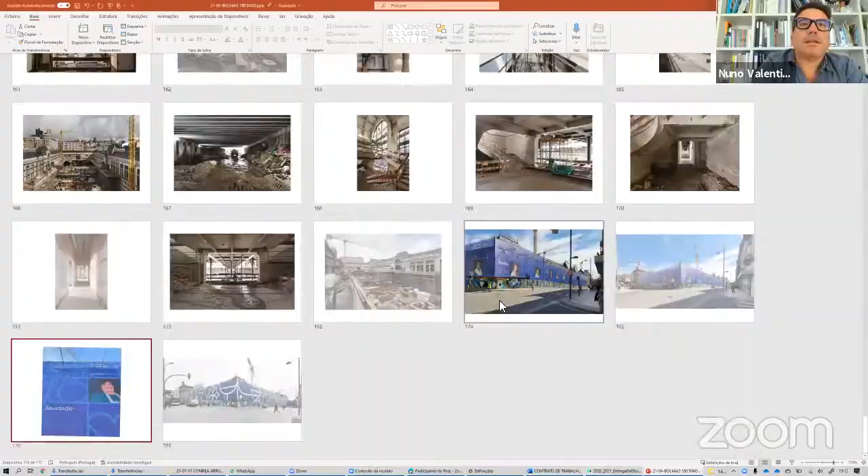Yeah. Yes, just a moment. And now you can start. Okay. I will share both screens. Okay. Oh, I'm sorry. This is it. Okay. Can you see it in full screen? Absolutely, yes. Okay, so I just make a small change here. Okay, and now — no, we lost it. Yep, for a moment. And now? Yes, it's online. It's good. Okay. So I'm sorry, I have to close the window because there's noise outside. Sorry.

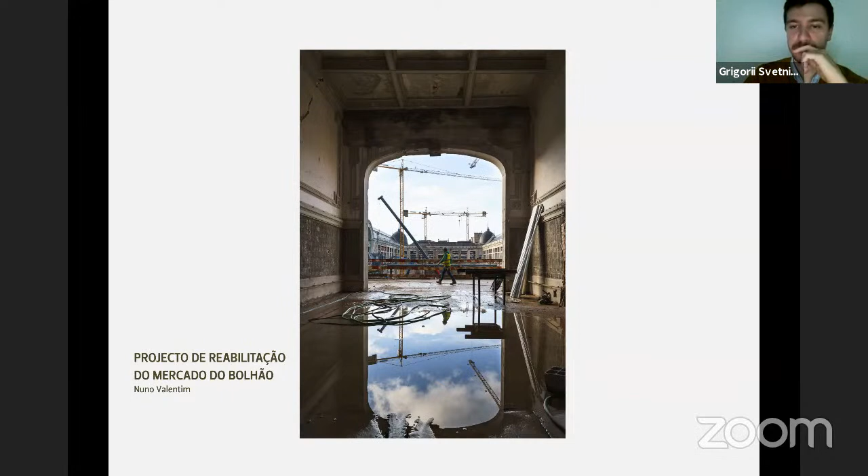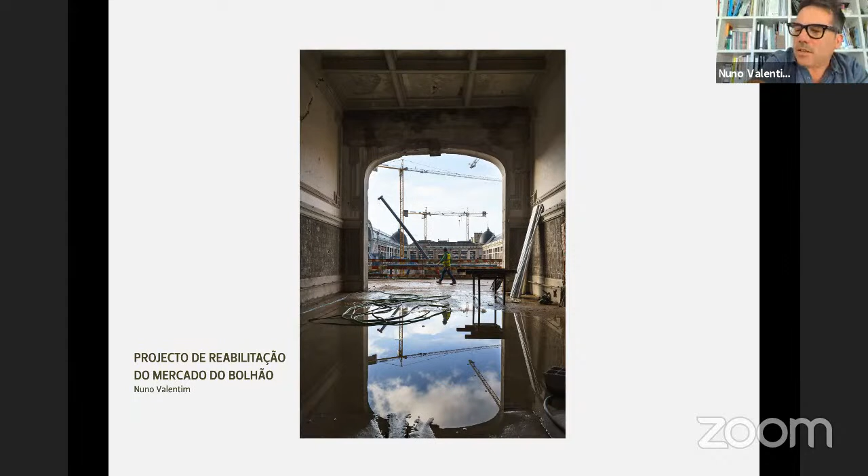So first of all, I'm sorry, I didn't have time to translate it into English, so there are some words in Portuguese, but I will translate them during the presentation. It's all okay, it's all fine. So,

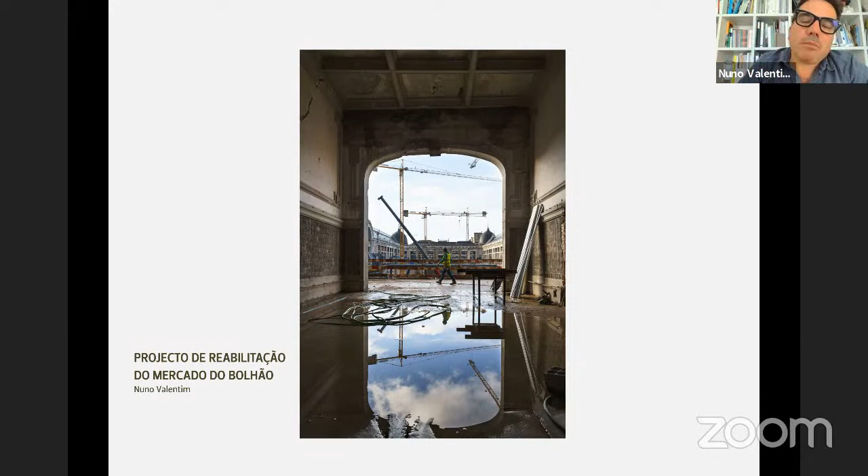Normally I present the market — this is the view from the high entrance, because Bolhão is an entire block of the city, in the city center, and this is the northern entrance at a high level. But I present Bolhão as an example, translating it from Portuguese, as an example of how political decisions must be informed by architectural knowledge.

So the first very interesting thing about markets in general — we have an expression here in Portugal, I don't know if you have it also in Russia — when we say 'I'm going to the market,' we say 'I'm going to the square.' If I say 'eu vou à praça,' I'm going to the square, everybody knows that I'm going to the market. So it's very interesting, this idea of founding the square as a meeting point and naturally as a commerce point.

So Bolhão — these are the first plans known from Porto. Here's the Rio Douro river, where the port wine comes from to Porto, and there at the east. Do you see my arrow?

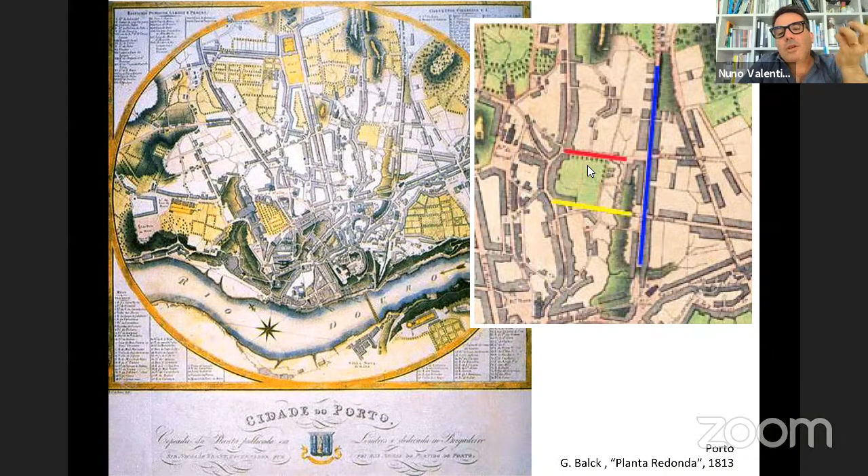Okay, so here's the sea, and as you can see, there's a green area here. This is a zoom, and this is where the square, the first square of the market that was built in the 1830s, was built.

This is the first plan known for the market, from 1837, and you can see the water that crosses the area, and the works that were needed to found and design the square.

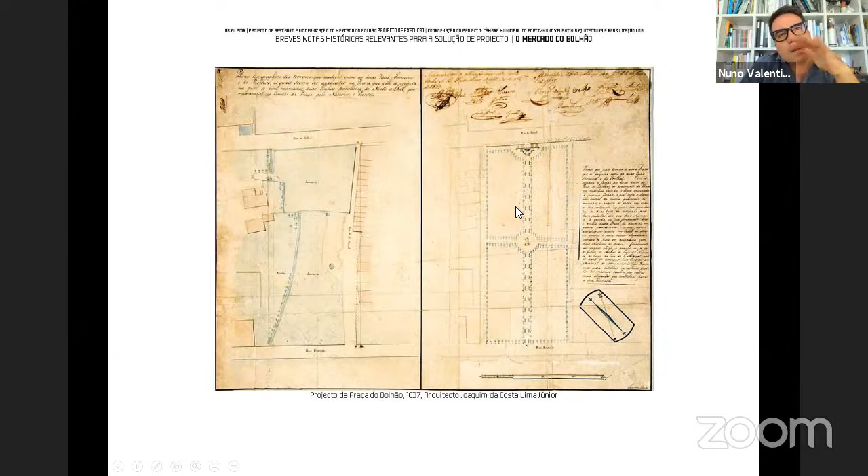Another interesting element is this stair. You can see that from here to here there was a big difference in height. These are the images of the first Bolhão square, an open market in the same place where the building exists today, more or less with the same area.

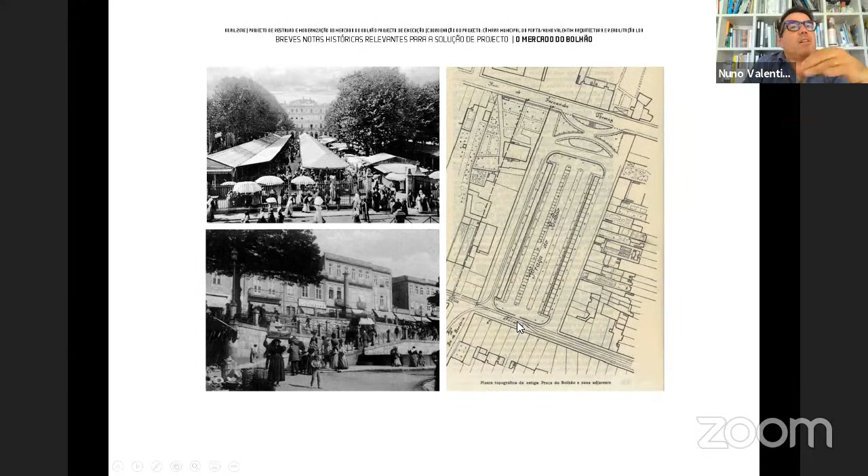In this drawing, you can already see the opening of the streets that would make Bolhão a block, a quarter of the city. And of course the stairs I was telling you about, showing the very significant difference in height between this street and this street.

The market was growing and growing, and the city hall decided to hold contests for ideas to make a covered market, in order to receive all the sellers that were spread around the city. This was problematic because of hygiene.

The only drawing known of our Bolhão Central Market is this one. But curiously, it's a covered version of the market, because, as you know, initially in Porto it rains - I wouldn't say a lot, but it rains often - and as you know, Les Halles in Paris was covered.

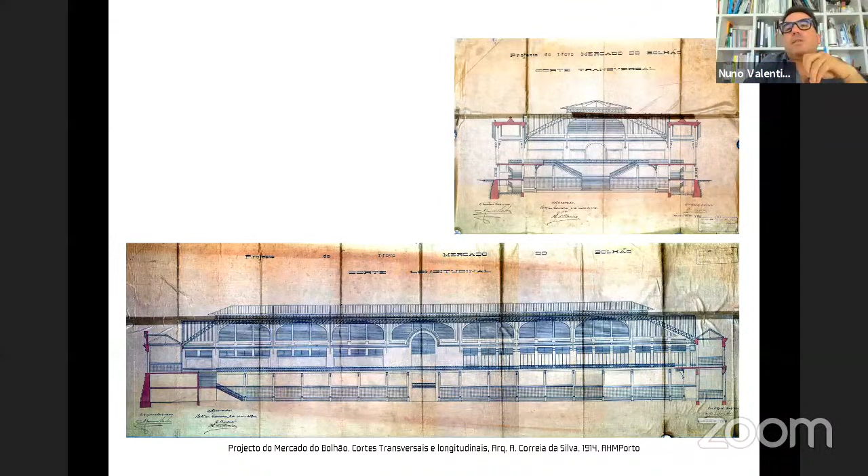The architect who designed the market, Correia da Silva, was a Beaux-Arts disciple and student, so he brought French Parisian ideas here, but nevertheless...

So finally they decided not to cover the market, but to cover it at a lower height. This is our old image. The market was built, in the same place as the old square, between 1914 and 1920.

It's a very impressive building, very beautifully designed, because it's very difficult to design these buildings on a slope like this. Here you have the north entrance, the high entrance, the west and east entrances, and then the main entrance here.

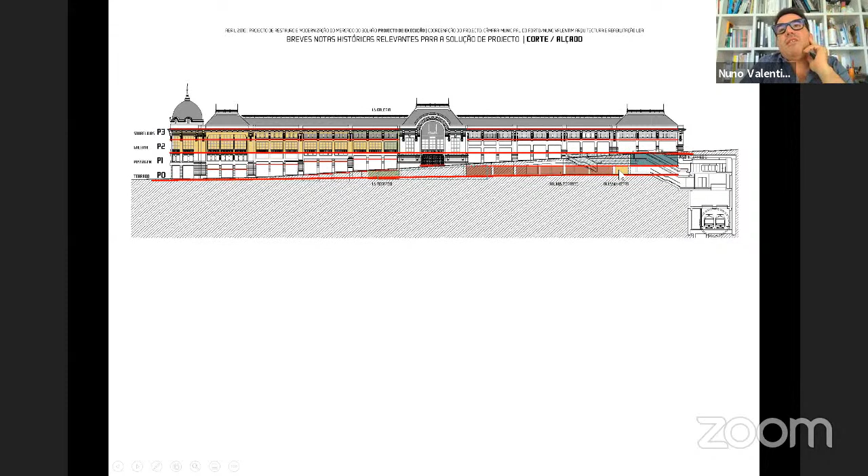Eduardo Souto de Moura, the author of the metro, of the subway, left the possibility of having this entrance directly to the market in future work. So this is very interesting for our work as well.

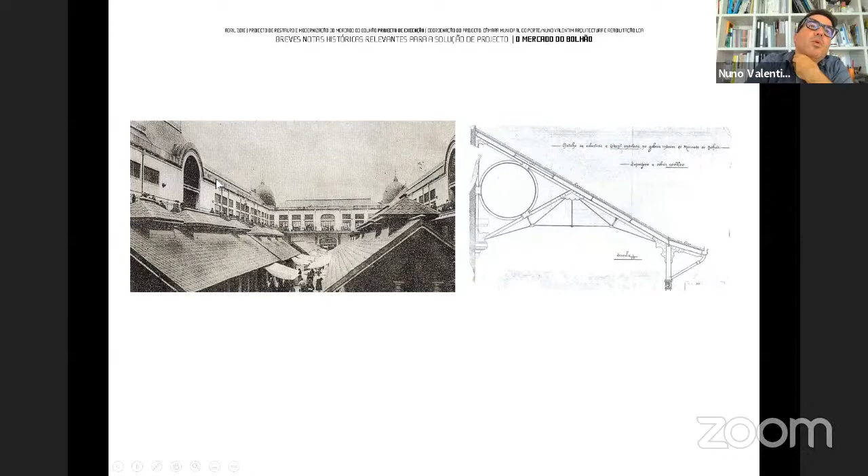These are images from the 20s, already with the tents that have to substitute the covering. As you can see, they were designed like houses. This is a very unique photograph because it was before this covering of the galleries was built.

Here's the covering, and here's the bridge that in the 40s and 50s they had to build in order to put the live animals that were sold here, because the market kept growing and growing and growing.

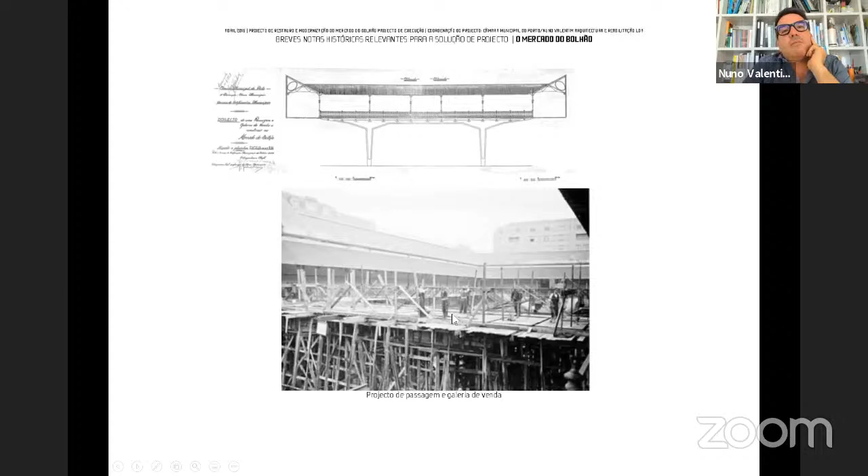This is a very particular place. Here you can see how the concrete bridge somehow made the market lose the feeling of the original square, because of this covering.

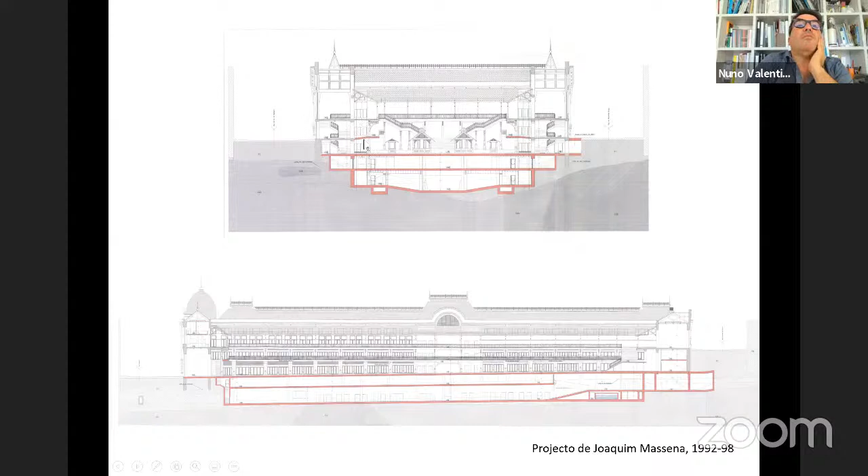But as you can see, the entrance came from a higher level, so this was very strange to enter the garage from a higher level and not from a lower level. To do this kind of structure would also be very problematic for the building. So it was a huge work.

This wasn't built, and 10 years later the new mayor, already in 2004, 2005, decided that Bolhao should be a commercial surface. So this is the design and solution of TramCrone, a Dutch enterprise that transformed the market into a gallery mall.

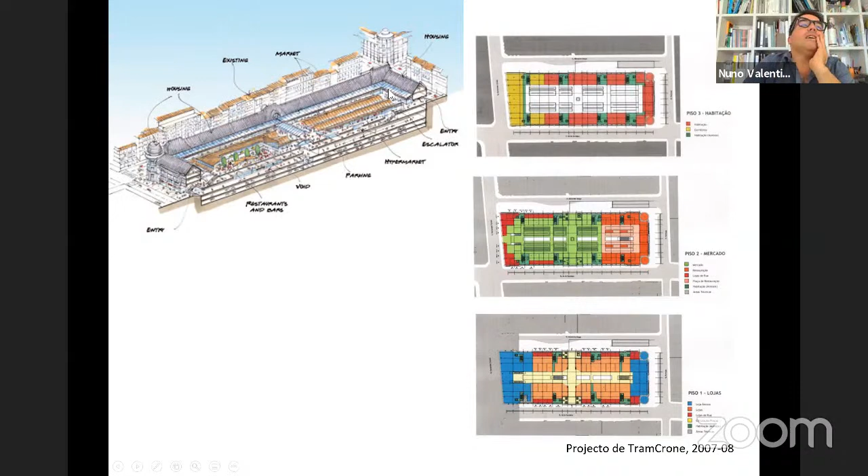So the mayor said, okay, let's give the building to the heritage responsible entity in Portugal, that's the DRCN, and this entity that supposedly manages heritage in Portugal decided to redo the original ceiling of the Bolhao. This was in 2009 to 2011.

So this is what would happen if this project, before our project, was built. This is an existing image, and here a 3D of the covered market, supposedly because, in the words of the architect from the Heritage Council, the only way we could keep a market functioning in Porto was covering it and making several floors of parking.

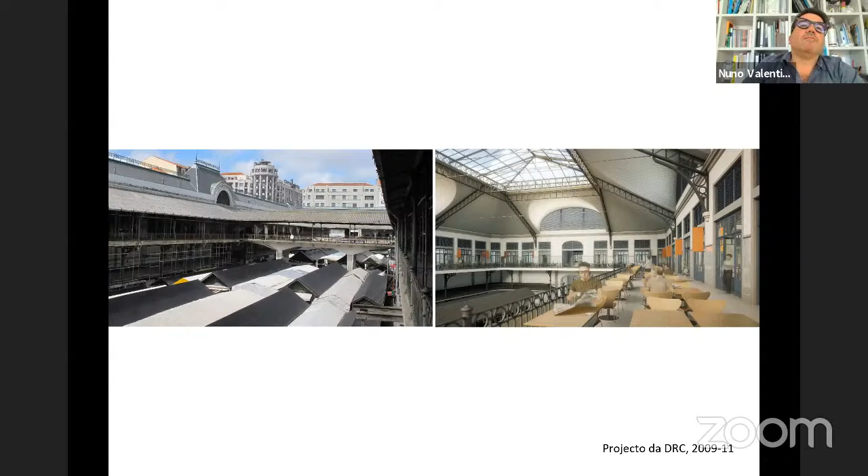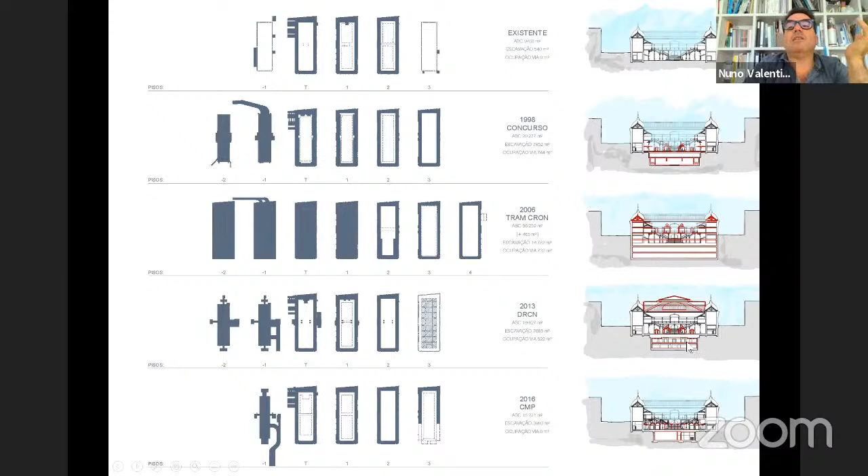This is also interesting data for this comparison. Our basement is purely a functional logistic basement and not a parking basement, because on the other side of the street we'll have 700 parking places. Here we also have a mall with parking. So we felt, and the town hall felt, that we didn't need the parking.

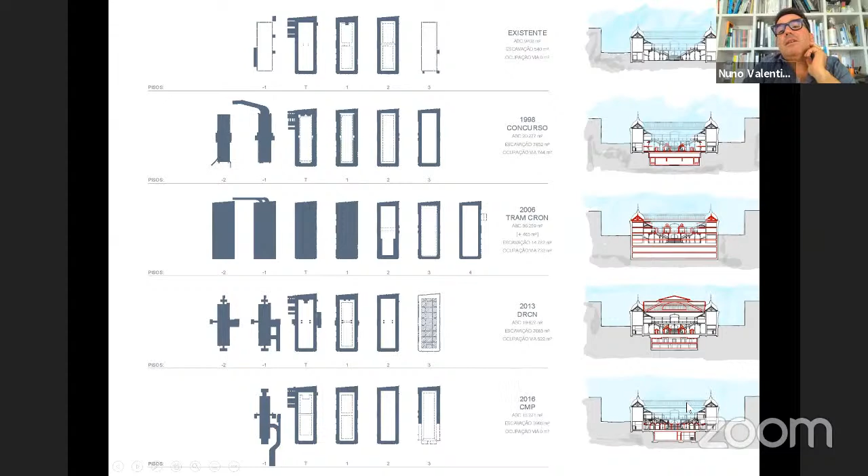And for sure we didn't need a covering. That's why the town hall decided not to follow the DRCN project and decided to invite us to make the project. So, very quickly, about the existing situation.

Well, this is also a very interesting topic of discussion. The Bolhao Central Market has two classifications, two national protections. This means that the building is classified, but also the activity is classified and protected. So people and their activities are, of course, also protected. This means that the architectural project must address both.

Both sides are on the table: material and immaterial. This balance can result in complicated decisions in order to sacrifice values of materiality in favor of immateriality. I will explain it later on.

These are images from the facades. You can see here how the facades were decharacterized, changed, and how confusion grew around them, with only a few original stores, like this one and this one, remaining with their original elements.

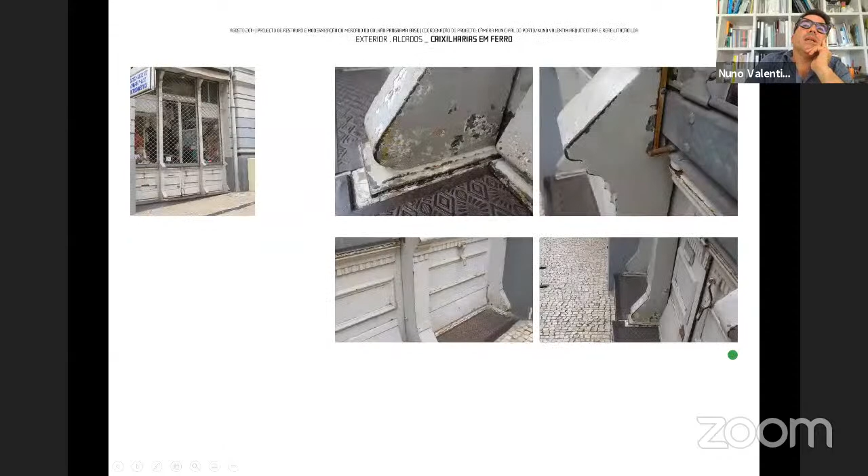Only the screens remained in some cases — elements we found very interesting to remake and put back in place, because they were totally lost. Only one or two stores kept this kind of element.

There's confusion around publicity, with some not interesting but somehow interesting examples. And the infrastructure, as you can see, is chaos.

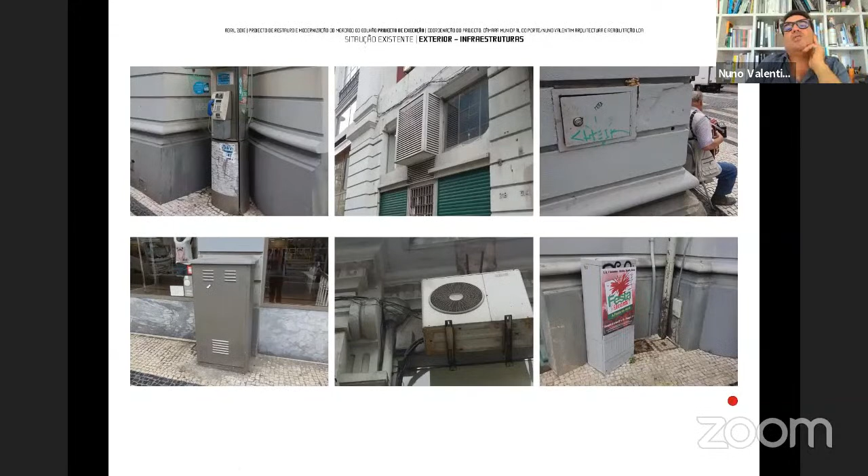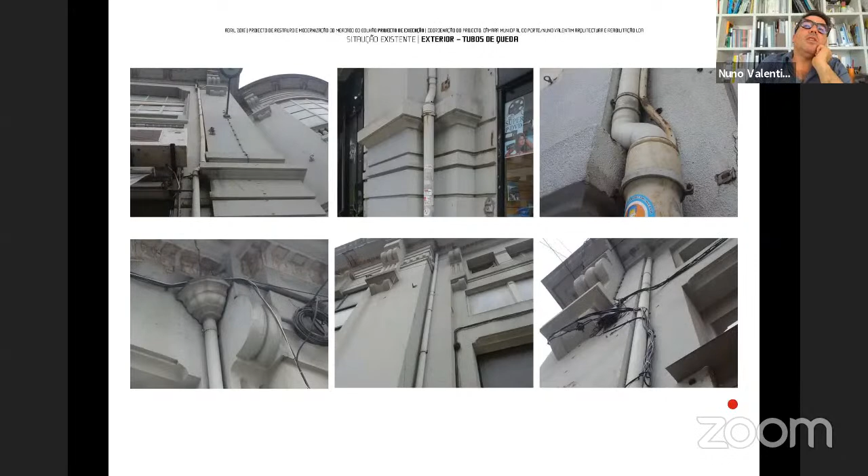The rain infrastructure was also chaotic from the beginning of the building, with no clear strategy, and as you can imagine, this caused a lot of problems, not only on the exterior but also, as you can see here, in the interior.

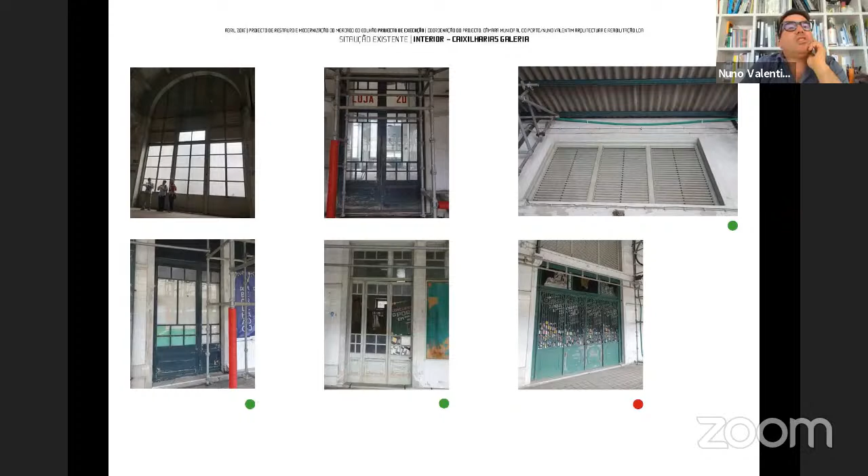The windows, either wood or iron, were mostly not original — only a few were. This was also very important, the study of the remaining ones, in order to develop a strategy for global rehabilitation.

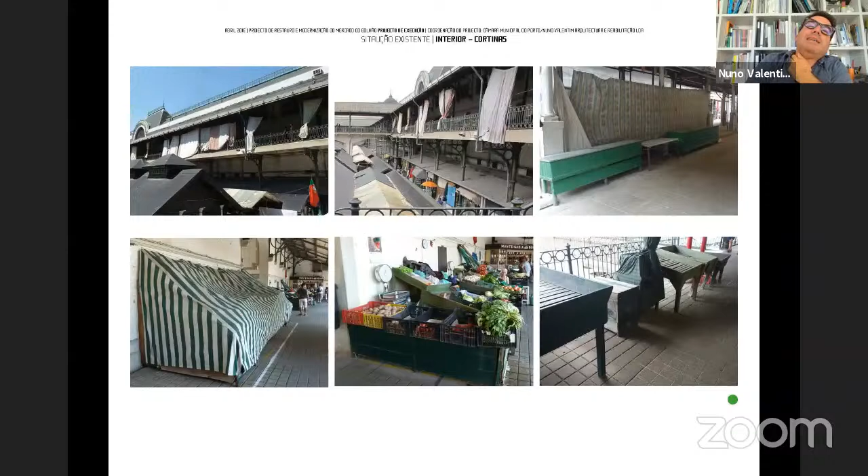Some of the sellers showed necessity and improvisation, like these tents used to protect the vegetables, or these selling points. These were very, very interesting materials to analyze and to inform the future project, as you can see here.

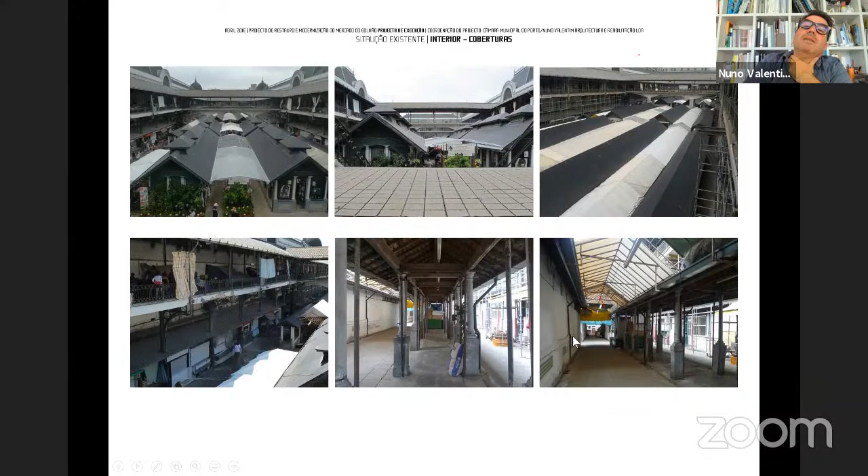These are the shades that the sellers used, carried directly from their stalls to the market. As I told you before, this is the way they protected the streets from the rain inside. They used the pavilions mainly as storage, and came outside to the streets to sell.

So somehow the original selling structures weren't functional and created many problems — a dense filter — and sellers preferred this clarity, this transparency between buyer and seller, as you can see here.

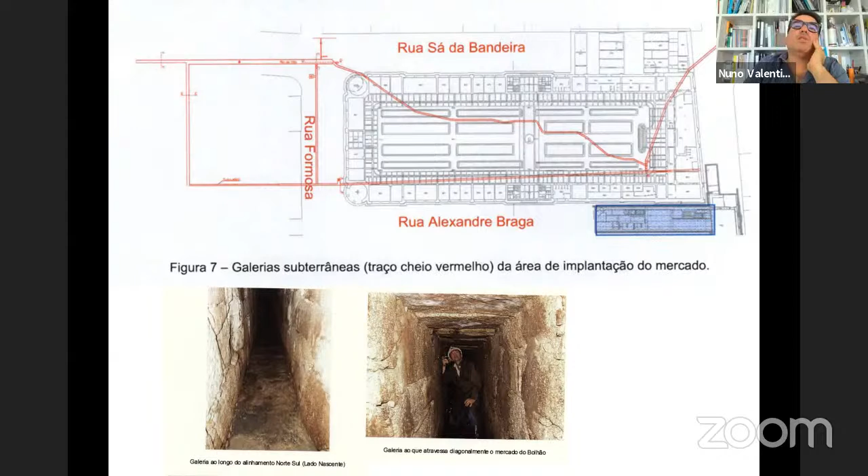These are not uninteresting examples of how they used the original pavilions. There was also the issue of water that needed to be taken elsewhere, causing structural problems, as you can see here and here.

The three topics the project tried to solve were: the character and values of the building, the character and values of the market itself and its activity, and the connection and relationship with the city. These are the three main themes.

The goal was to articulate and re-articulate the relationship with the city — making it more transparent, accessible, articulated, comfortable, communicating, hygienic, and functional — to restore and redignify the physical aspect of the building, its identity and coherence, removing the bad interventions made over time, and to make an upgrade, an aggiornamento, of the fresh municipal market.

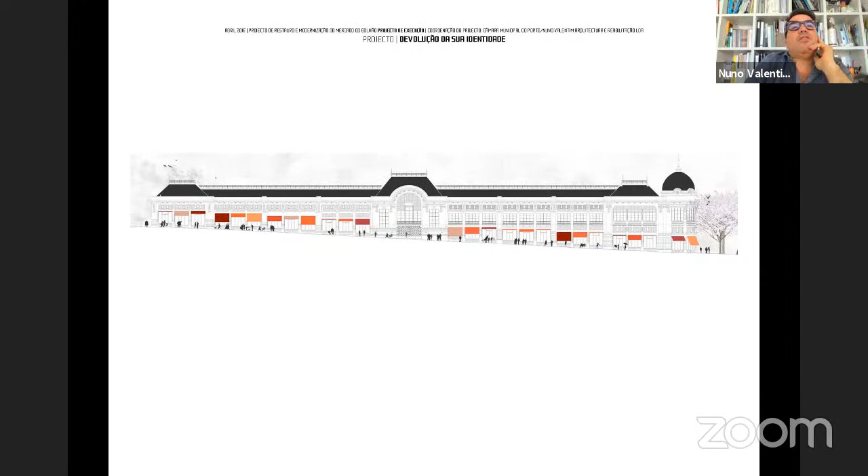Because, as you know, today having a central market is a very complex and demanding challenge. These are some drawings of how we tried to recover the lost identity and image of the market on the outside, recovering the original window shops and redesigning them as close as possible to the original drawing, while improving, whenever we could, the performance of the windows.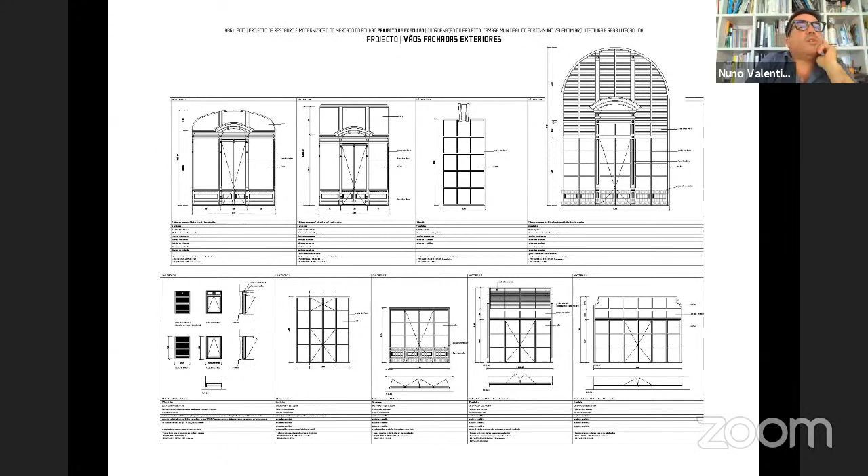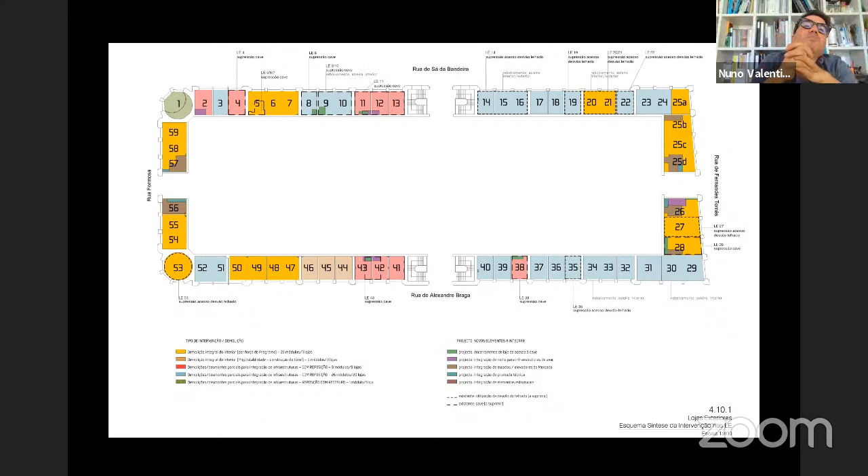There's also another project inside the project: the 60 stores that exist toward the exterior. Each one has its own project, but we had to organize the floors, the new accessibility, and the infrastructure in order to have a clear management of what was happening. Here you can see the complexity of the alleys and of the volumes.

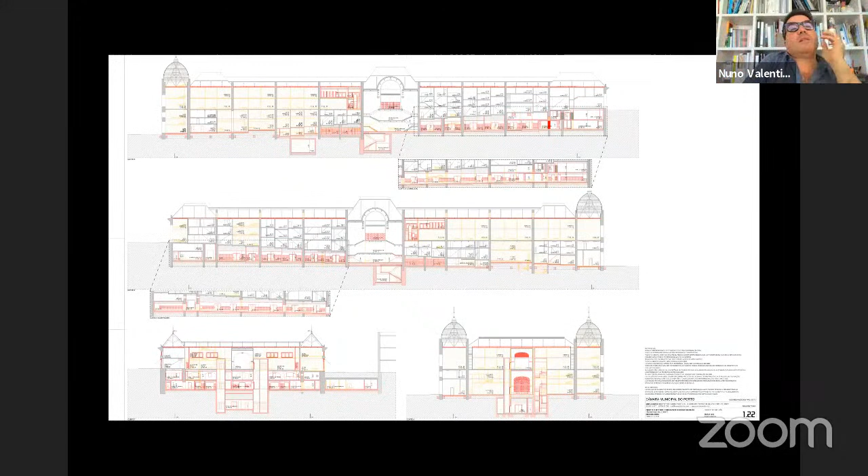That were on the outside. Here's the plan — as you can see, a very, very complex plan with many variations from shop to shop. The owners will carry out their own projects, but anyhow we had to give them some guidelines in order not to destroy what we were trying to organize globally.

These are the global plans. So in green, you can see this is the upper floor, with coffees and restaurants using the former gallery where the butchers were. And here you can see the new fresh gallery open to local producers, seasonal food, street food, etc. This is a very open program gallery that will be managed by the administration of the central market.

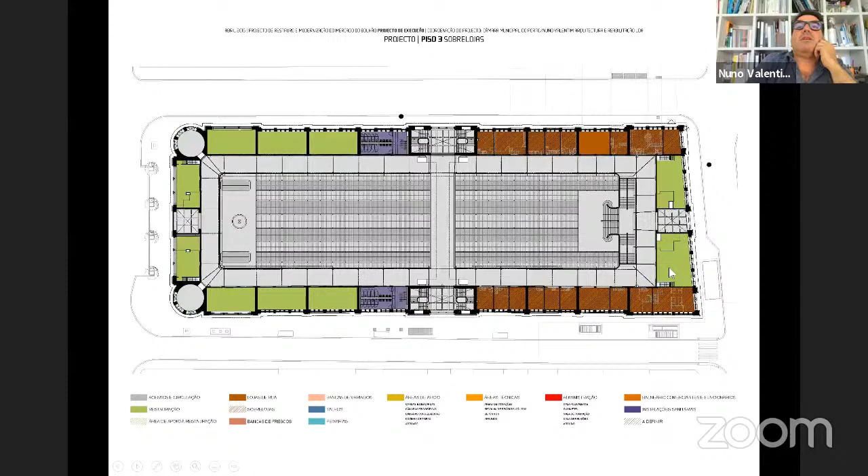Then if we go down to what we call the terrado, that means the square itself where the market happens, it's here. So you've seen the plans here upstairs where the butchers were. Here you can see the tents that we are recovering also in order to protect from the sun, because we'll have tables outside that belong to the restaurants.

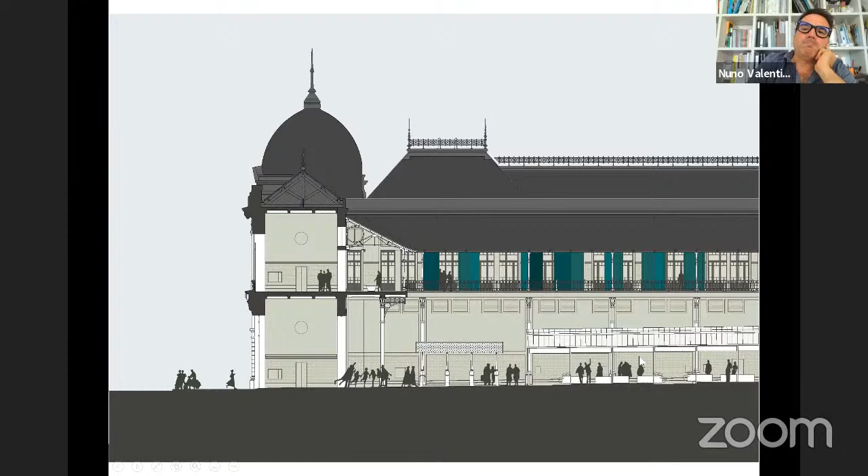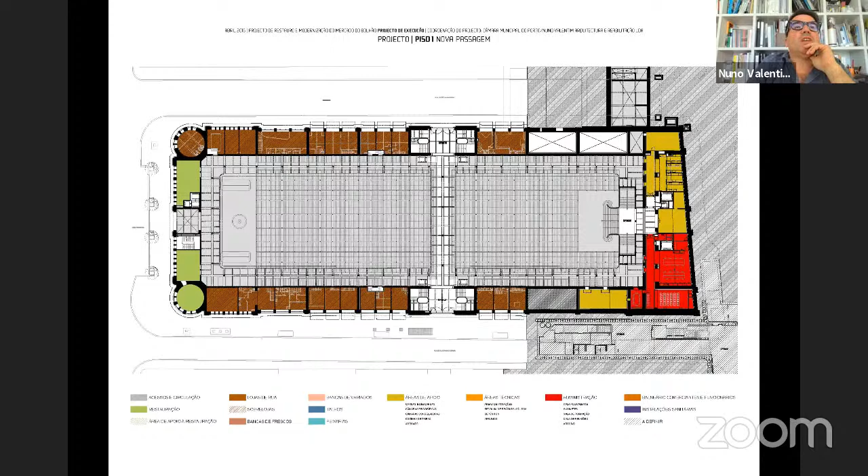So in here downstairs you can see the new market, let's call it like this. These are the windows from the restaurants upstairs, and so downstairs we'll have the market itself with the 5 streets that you can see here. They were slightly redimensioned in order to make them more functional. The butchers here, the fish selling stores here, and of course toilets and other infrastructures, and this is where the market will happen.

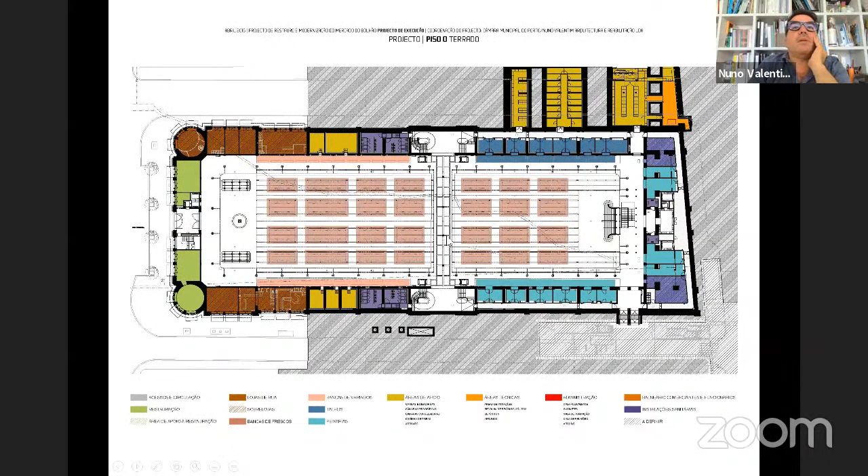Again, you can see nowadays any market needs a logistic basement or surface, very functional. So we decided to make it only logistic, because the parking, as I told you, it will be outside.

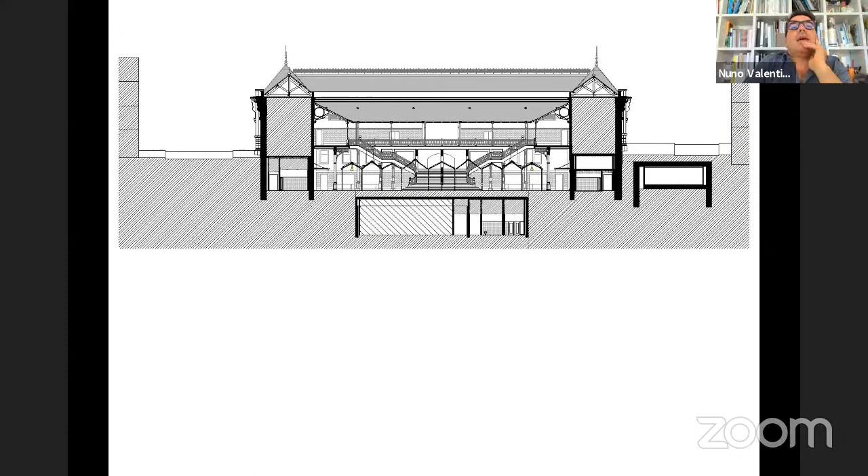That problem was solved. So we excavated the central part of the square in order not to touch the building itself. And we redesigned, as you can see here, the original, the former - we reinterpreted in somehow an analogy of the existing solution. So this is the basement, the central basement, and the 4 connections with the existing vertical circulation.

And the tunnel that I was telling you, that allowed us not to occupy public space with the access to the tunnel. So here the trucks can enter in order to supply the market. Here are the 2 tons elevators, the ice zone, because you always need a lot of ice in a market.

The boxes for the sellers, they all need some back office, some arrangement, to make their own stuff. The function for the toilets and the showers, etc., for the guys that work in the market.

The reservoirs of water, also the zone of garbage, the garbage zone. So also the trucks of garbage need to come here and to take the garbage out.

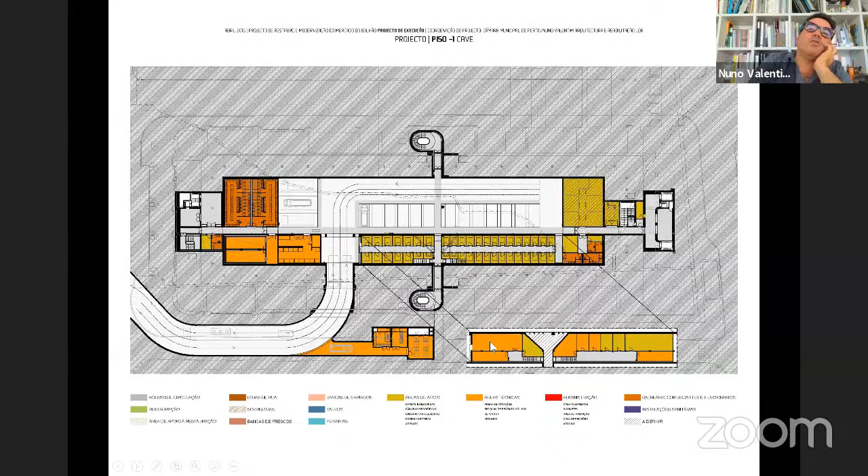So of course, for instance, the meat comes from outside, it will be delivered here and then goes up within this functional area. And of course, another infrastructural area. So here's the tunnel that allowed us not to occupy any public space. So this is, everything happens under the floor.

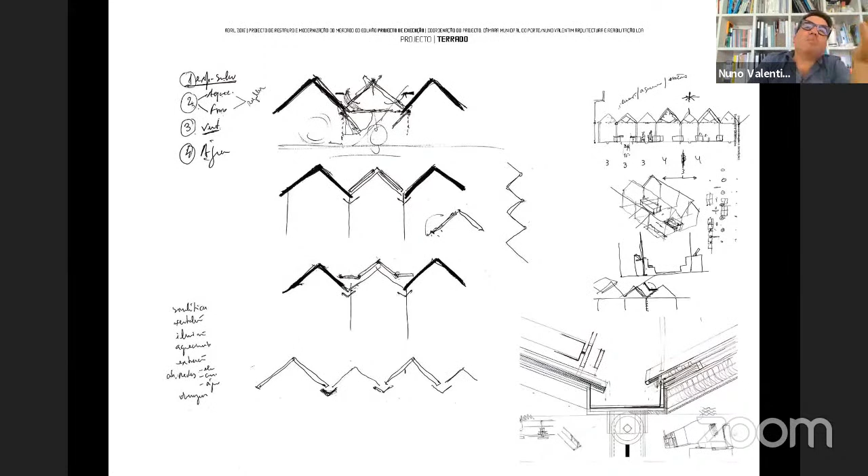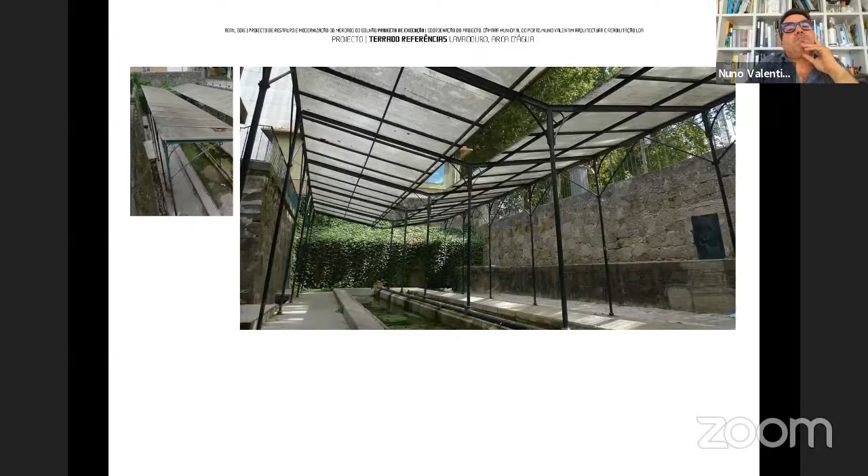And these are some sketches from the main theme of the market itself, the selling, the 5 streets, the selling points. We always saw them as an analogy of something that already existed in the market. And this was the idea, inspired by traditional washing structures around Porto. So here's a construction plan. You see here the basement and the new structures and the relationship, the butcher here, partially integrated, partially exterior, but leaving the pillars free to be read.

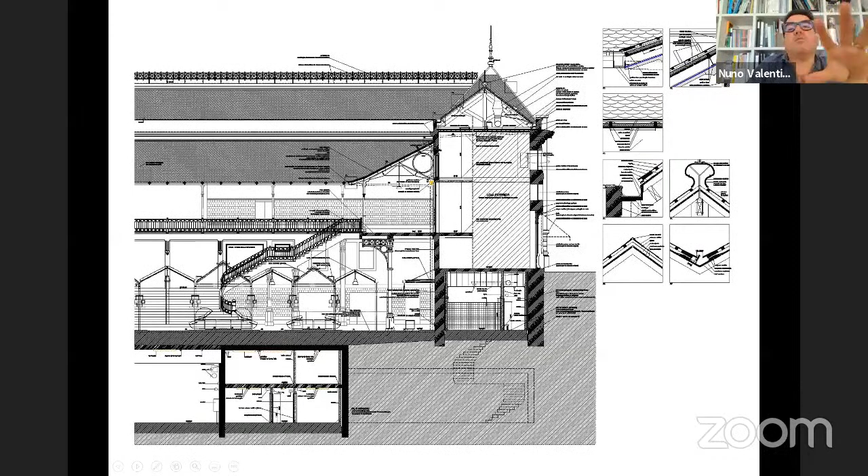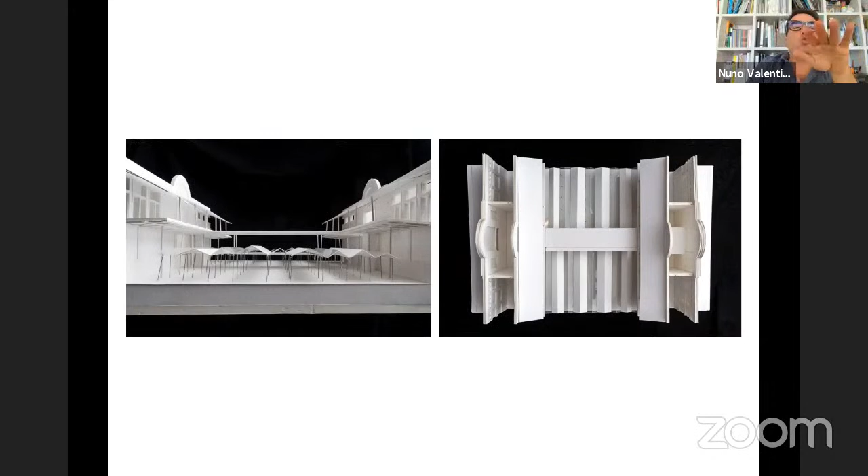Some studies in order to find the correct form of this new covering, but of course in a lower plan, very, very close to what existed. So we are not inventing anything. The solution was already there. As you can see, we can have the best of two worlds, the exterior and the interior.

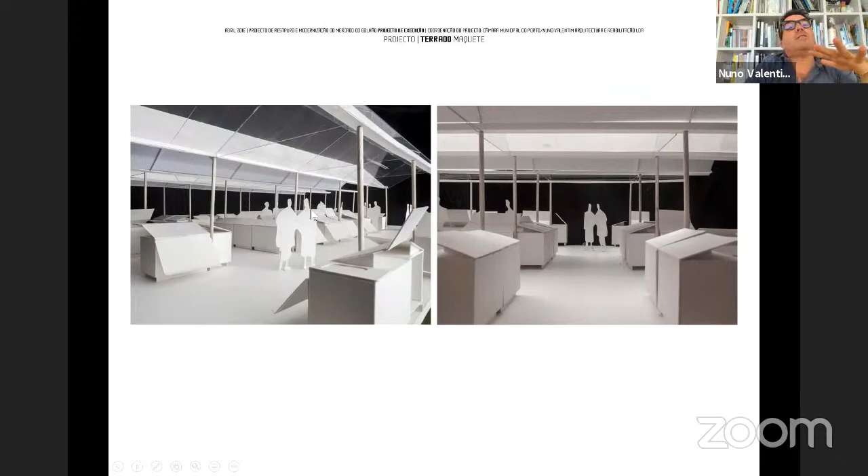Some studies also of how these equipment elements could work and could transform themselves in somehow the amphitheater that the sellers need, as in these images of traditional markets that work really well - this tension between the selling and the seller, and the seller and the buyer, this closeness.

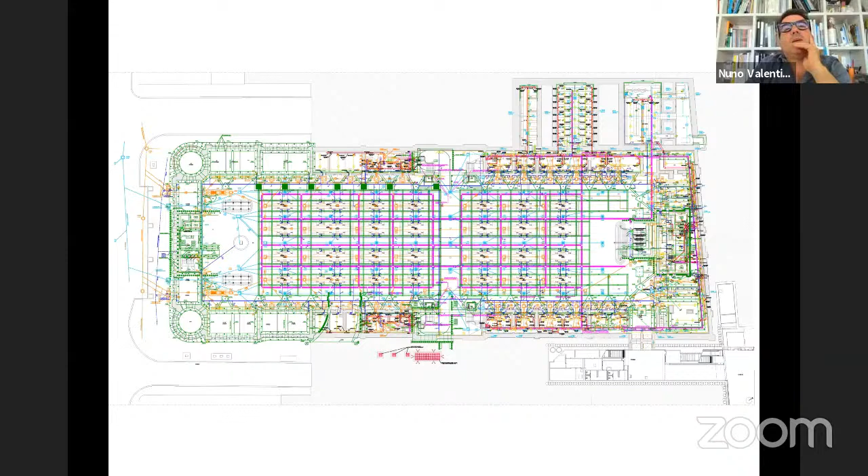So you can see it here. This is already an on-site image of how, well, making a market today is really a complex challenge.

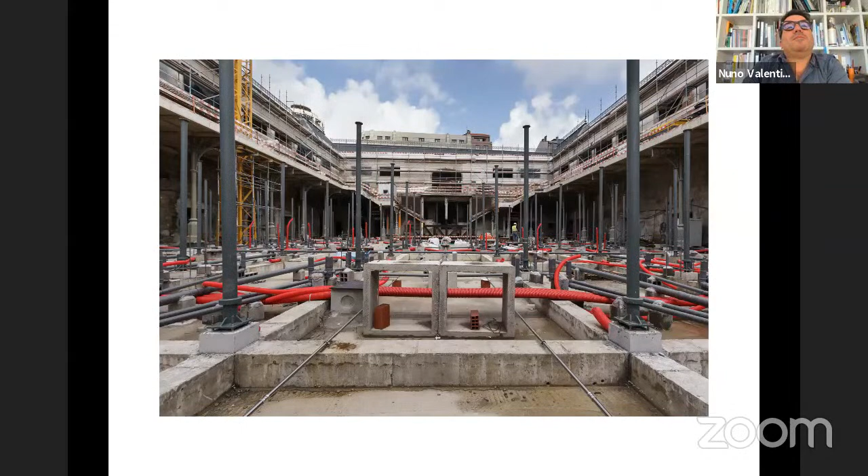Many infrastructures to manage, and of course this is an original image where you can see this 80s layer of covering that imitated the ardoise. I don't know the name in English, but you know, the ardoise tiles.

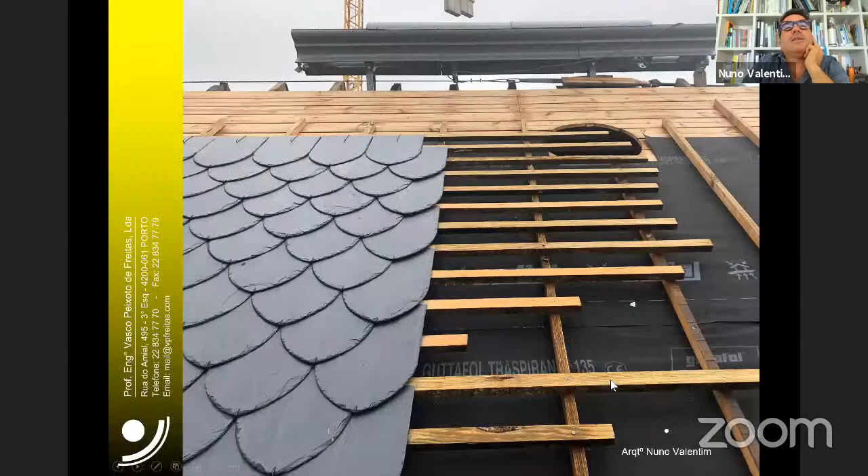Typically French, but used all around Europe. This is an imitation coat made in the 80s, but we managed to recover and remake the ceiling in ardoise itself. This has a very beautiful light and reflection, completely different from the old.

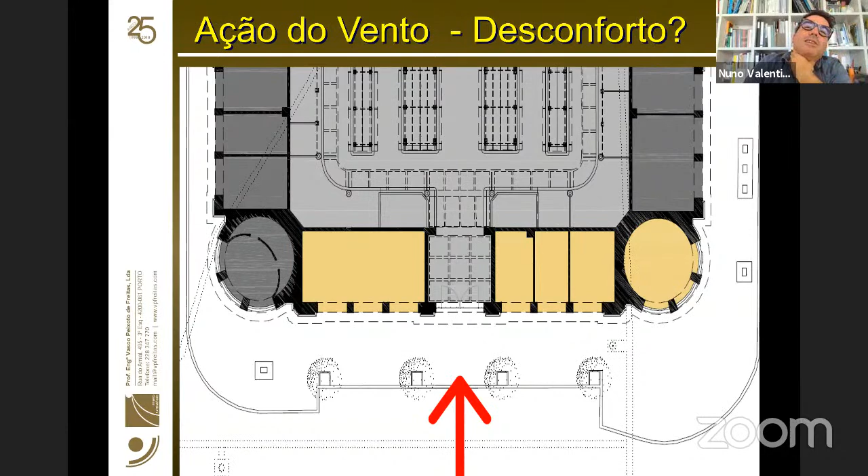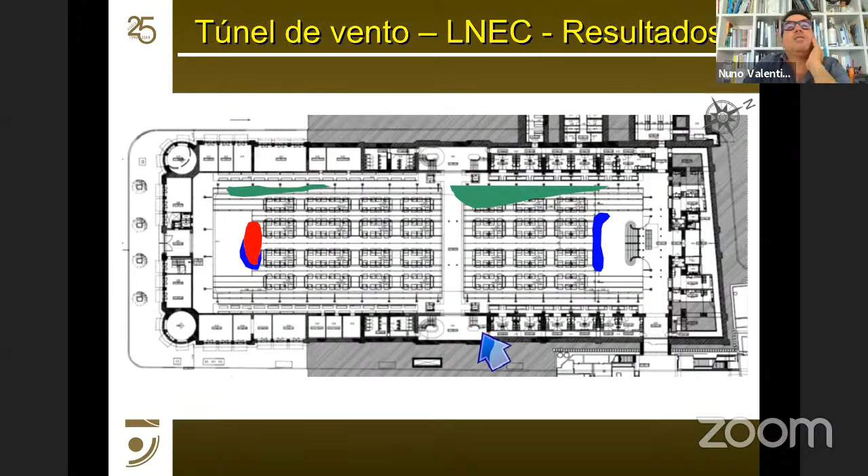We needed also to study. These are from our engineers, studying in the tunnel, in a wind tunnel, the effect of the wind inside the market. We arrived to the conclusion that this wasn't worrying, the effect of the wind inside the insolation studies.

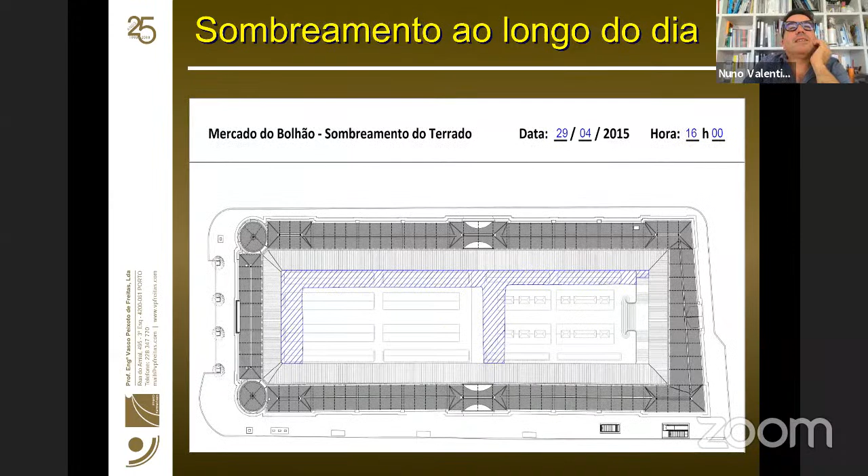And because we needed also to control the temperatures underneath the new covering, we arrived also to a very pleasant conclusion that with some punctual exceptions, we are always in the comfort area using this covering.

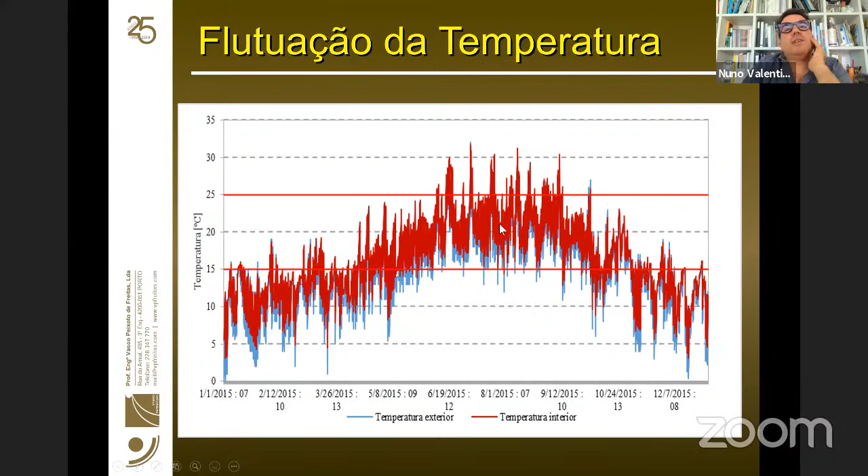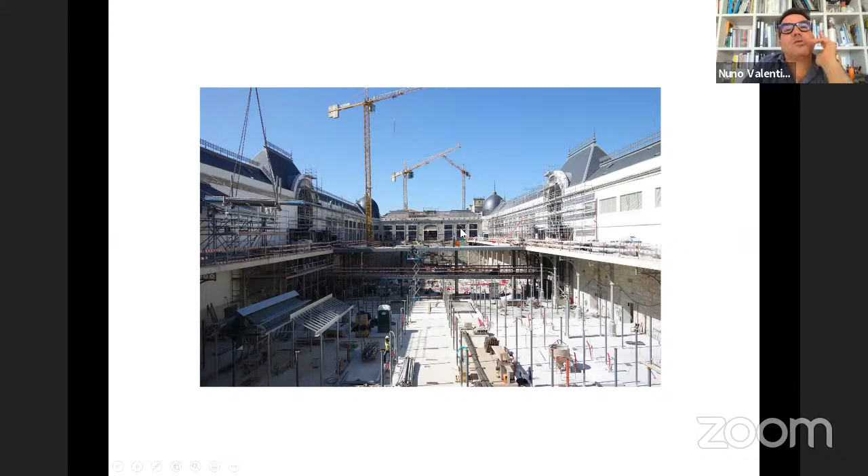So these are images from the site. The new bridge that won't be covered in order to see totally the original square limits. These are essays, prototypes for the street and for the selling point.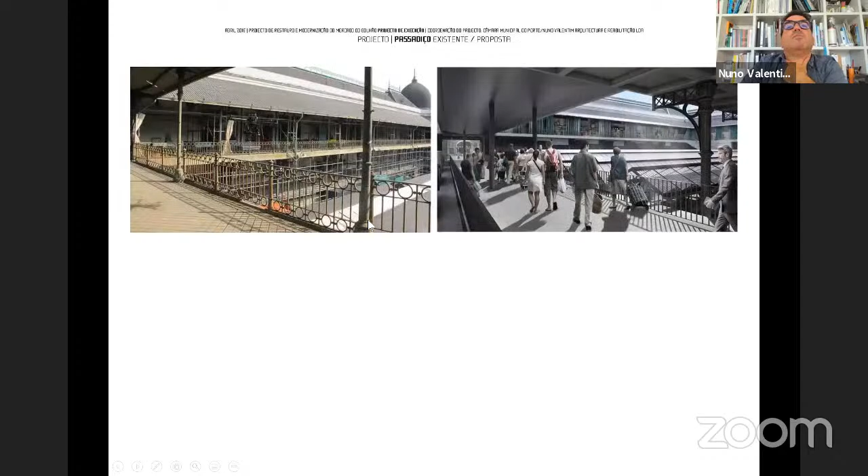Here, the design of the bridge and some final images of the passage without a covering, that allows us to have this view of the original skyline, the Beaux-Arts skyline, not interrupted by the bridge.

So the bridge is only here and here, and here you have the movement of the streets that were always there. So we feel that we kept very close to the original intention.

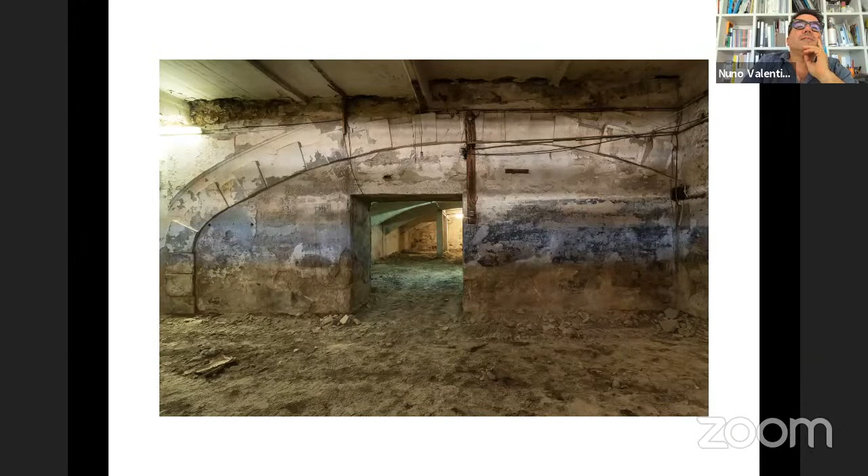Some last images of the ongoing sequence of the site. This is underneath the streets. We will use these spaces as boxes for the sellers also.

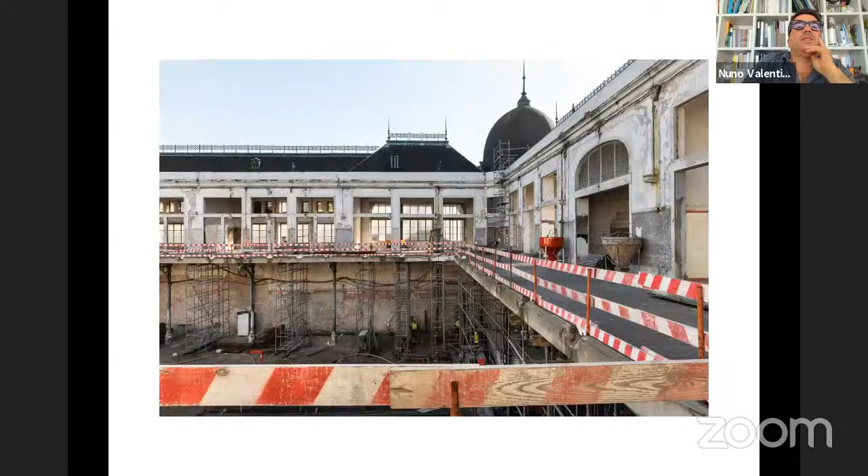You can see also the transparency that the market will gain with this operation, with this cleanness, that somehow was lost because of the type of glass and the occupation.

The effort that is being done in order to keep even slabs of concrete from the 20s. So this is only to keep them in the site.

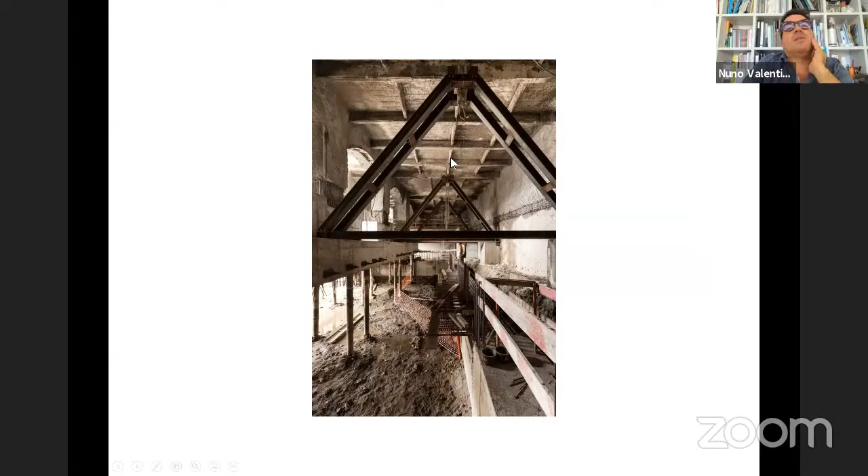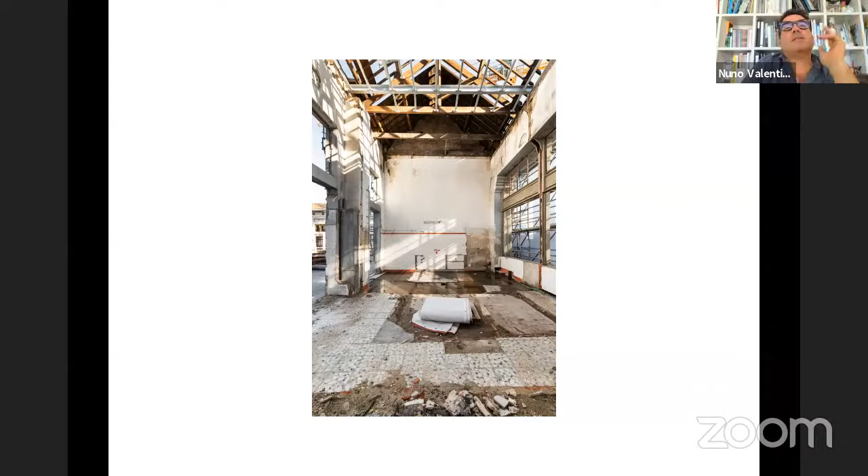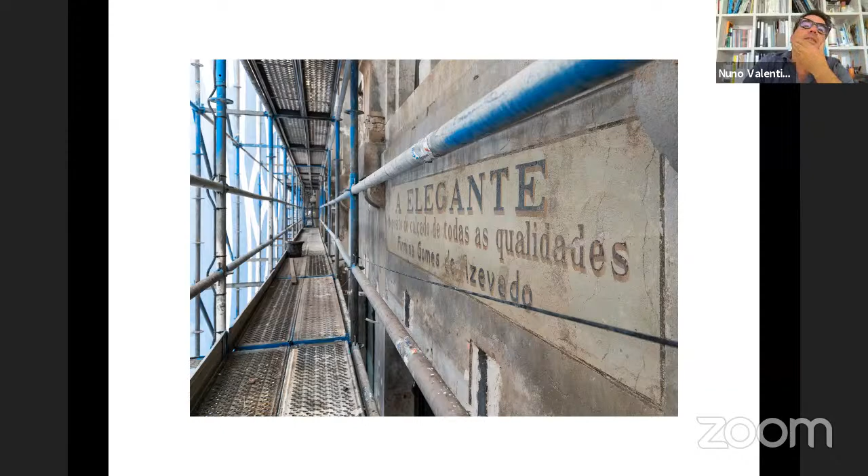The traditional wood covering behind the ardoise. Findings that we didn't imagine were there, publicity hidden beneath the coat, the terrible coat of painting that they made also in the 80s.

The sculptures that are also being restored. The original color behind the terrible color that was made.

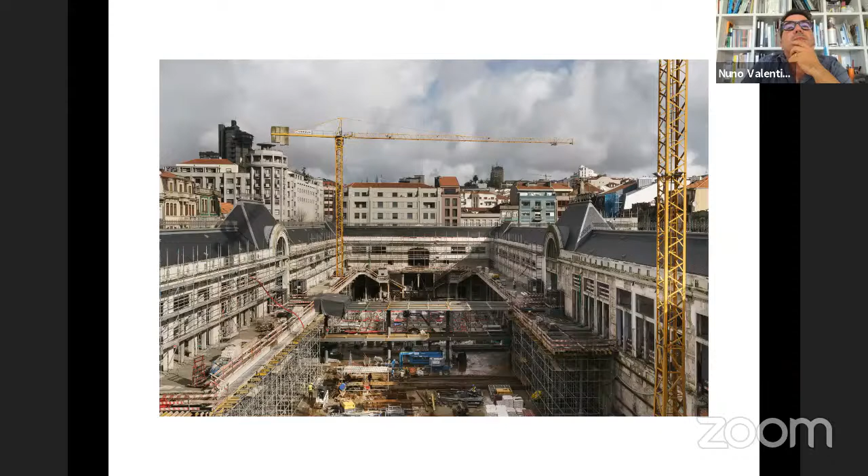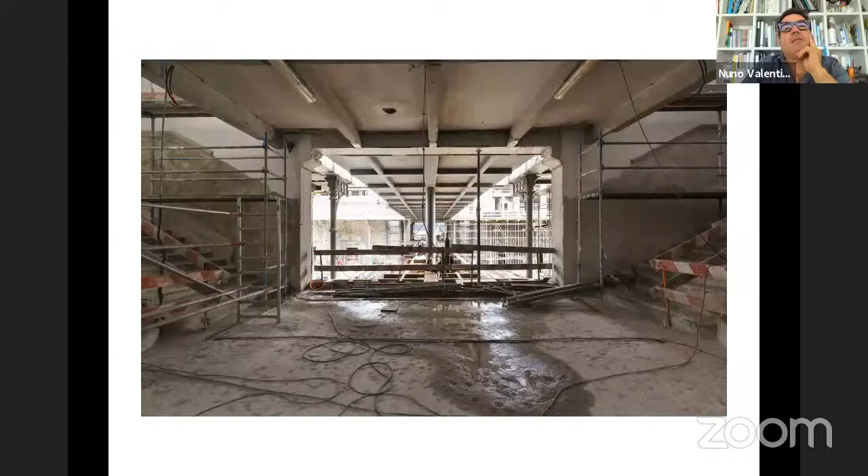The basement, the excavation. The service areas, the bridges, and the sellers waiting to come back.

So that's it. Thank you.

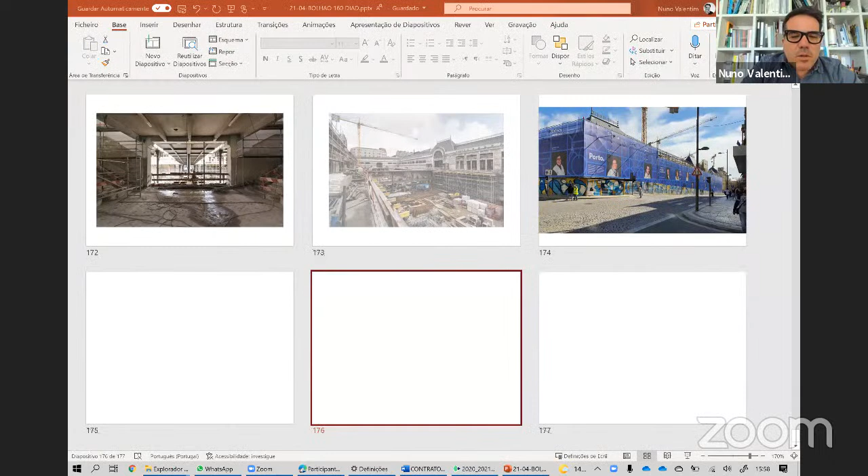I'm sorry, I don't know. Am I still sharing the screen or not? Now, yes, I can. I'm sorry, I'm searching for a way to stop sharing the screen. That's okay. I don't understand why I can't stop sharing the screen. Can you help me, Gregory, or not? No, interrupt my sharing.